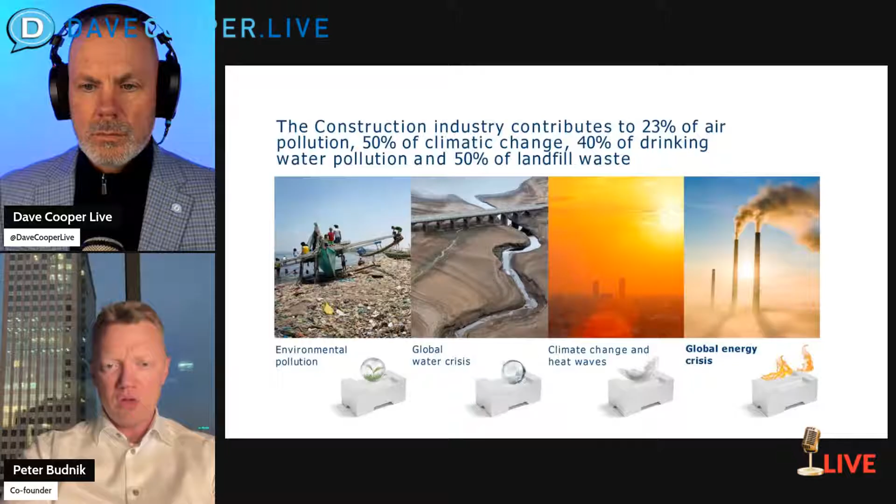Then secondly, we have the climate adaptation need, where System 3E is eco-friendly. Blocks are made from perlite and are healthy, and they reduce carbon and water footprints. Actually, we have the lowest water footprint of all the building blocks. And back to number 1, we are simplifying construction with fewer tools, materials, and labor itself. So it's actually a third point.

Then the main composition of the block is perlite, which is a volcanic rock. It has air-filled pores, which provide top insulation. It has neutral pH, so it's also mold resistant. And just this feature is absolutely a huge USP. These are just the main properties of the block.

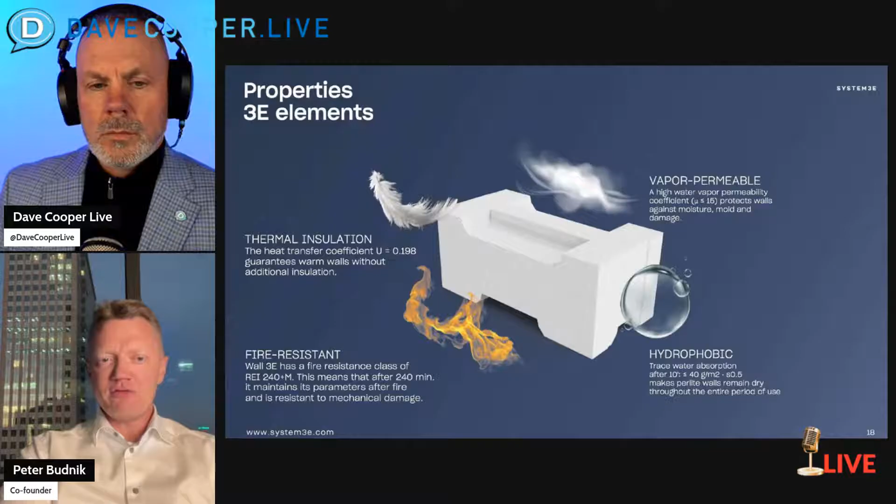It's fire resistant. It has great thermal insulation, so it's good to go in Greenland, Norway, Sweden, upper states, all the colder regions, as well as in deserts, where the width of the block, which is like 1 foot, protects both from heat and cold. The elements also breathe and are hydrophobic. We add hydrophobic agents so they don't soak any water in. So you always have dry walls, which is a brilliant feature.

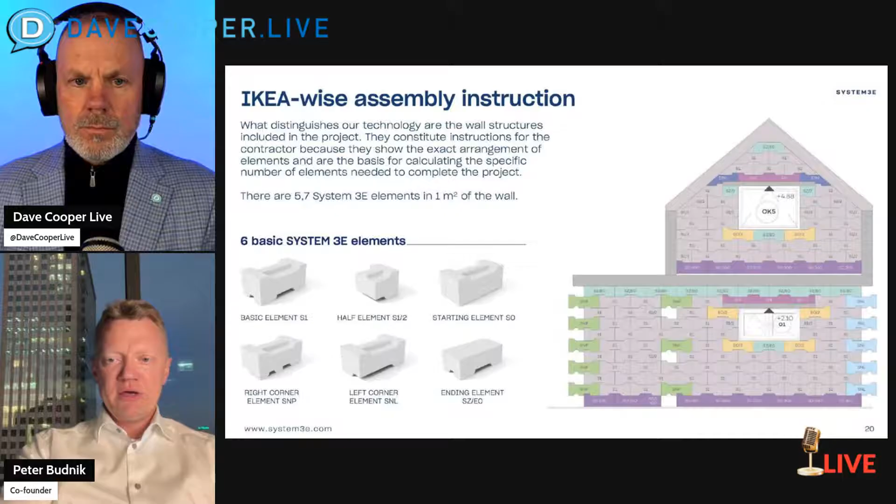So the system has 6 key elements covering 80% of the wall. IKEA-style manuals are something the contractor gets with his elements order, and color-coded parts simplify assembly. And just to recap, we have the thinnest, the warmest, and the strongest 1-layer perlite wall in the world.

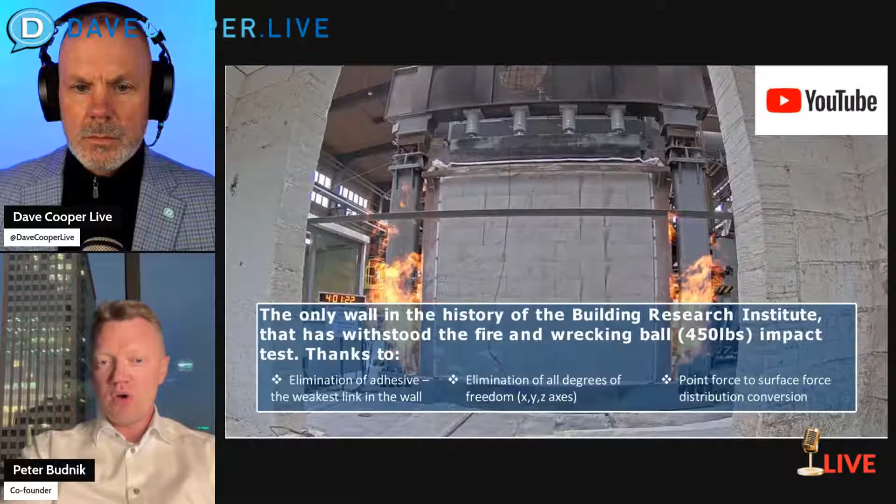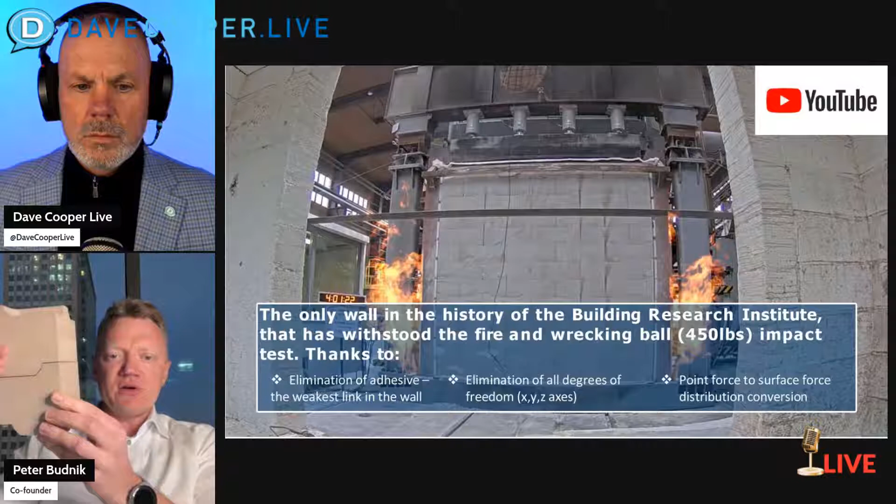And by the strongest, I mean that our wall passed the toughest fire and impact tests, where there are no weak links, because we don't use any mortar or glue. The weakest link in the wall is always the adhesive between the elements, which never maintains thermal or compressive strength parameters. And forces are distributed evenly thanks to the interlocking shapes, where all the degrees of freedom along the X, Y, and Z axes are fully constrained. And this makes our wall a monolith. So if something hits the wall, it just stays very solid without a single scratch.

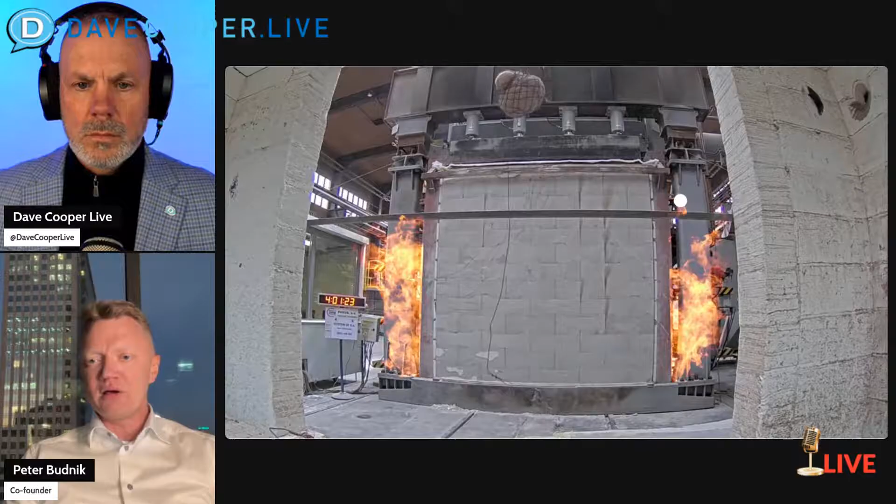We can show a short video presenting an actual test from Czechia, where we were the only technology in the history of the Institute where the wall not only passed the fire test, but also passed the wrecking ball test without any scratch, any damage in the wall. We were the only ones.

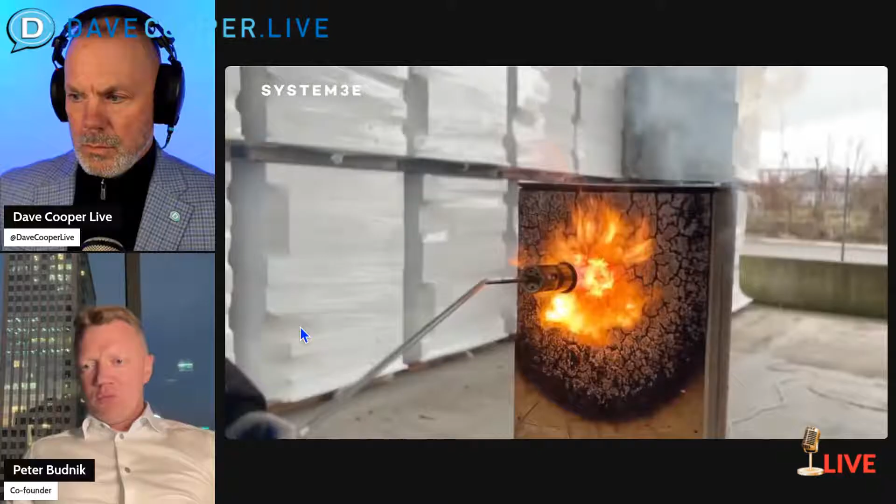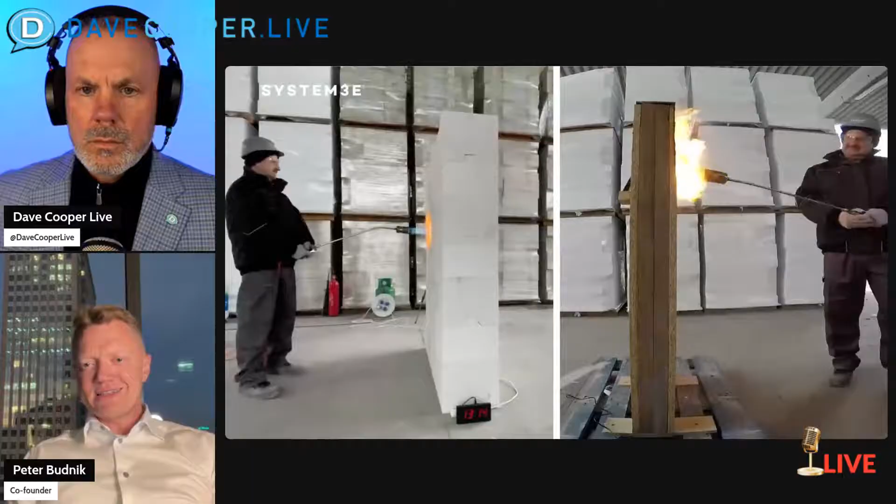And regarding the fire, we have another video that we can have a look at. It's like a small comparison between wooden frame parts and our wall. No-brainer, perlite is fire resistant. It just doesn't burn. And comparing to wood, these are not even real conditions. It's like a small torch. So after 60 minutes, you will see in a moment the burned hole. In our case, the whole wall is intact and it's perfectly fine, because we have the maximum fire resistance timings. Wow.

Is perlite available all around the world? Yeah, it's abundant. The number 1 producer is China. Then we have Turkey, and the US is number 3. So there's a lot of perlite in the States, New Mexico, Texas, Arizona, the southwest mostly. And it's 4.5 times cheaper than what we have in Europe. So if we launch a production facility in the States, the costs should be significantly lower than here in Europe. Great, thanks.

So going forward, we have IP protection, which comes from the unique element shape, ensuring strong friction-based bonding. In hurricane-prone areas, we have dedicated pre-drilled hollows that allow structural reinforcement in case that is a code requirement.

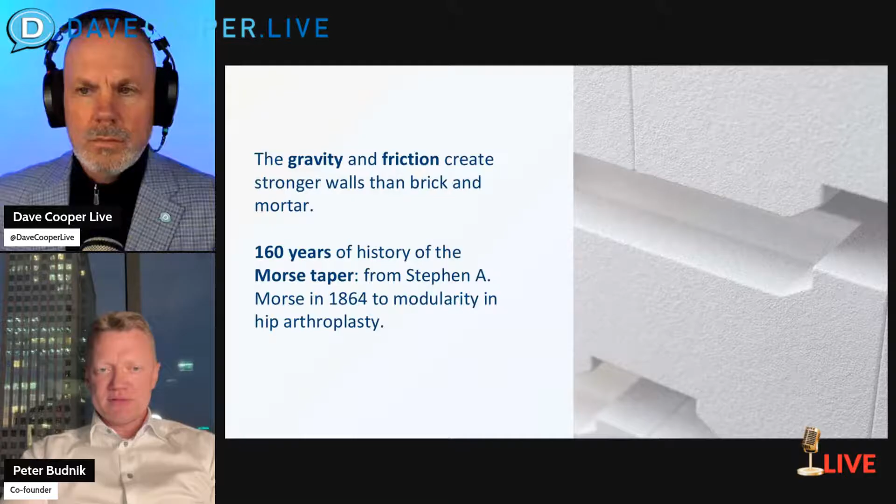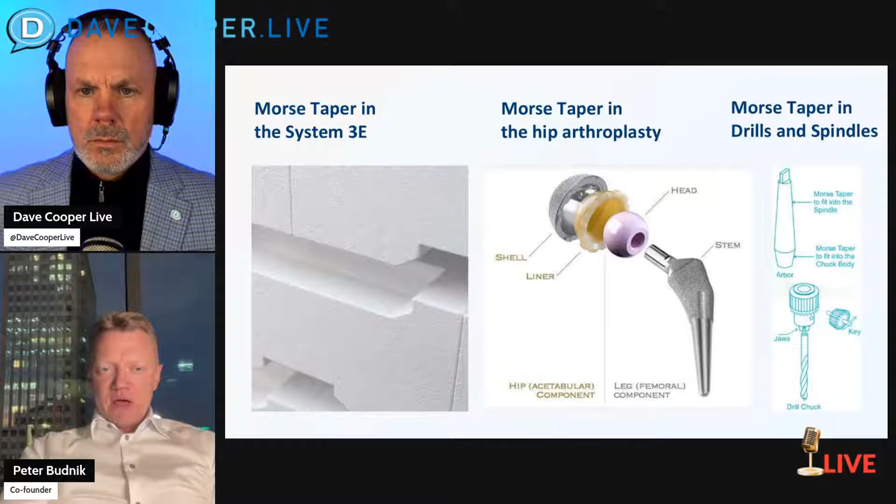So at these angles, we reach the highest friction forces, which allow the blocks to connect together. And because of the friction forces, we have the strongest binder we can think of, and it's much stronger than mortar, which never maintains compressive strength. When you read carefully the technical books of, let's say, brick and mortar technologies, they always recommend applying the thinnest layer of mortar possible, so as not to weaken the wall.

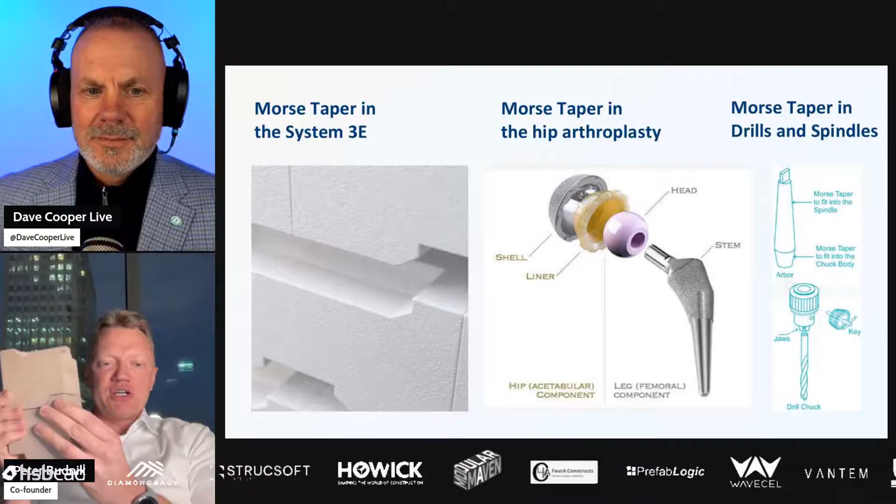And if you go to Italy or France, for example, for your vacation, and you see these old houses built with brick and mortar, when you look at the external part of the wall, you can sometimes see the cracks on the outside part of the wall, and they always go along the trace where the binder was applied. It's no coincidence that this is not passing the test of time. It's just a much stronger connection, like the gravity in the pyramids in Egypt. It's a similar thing.

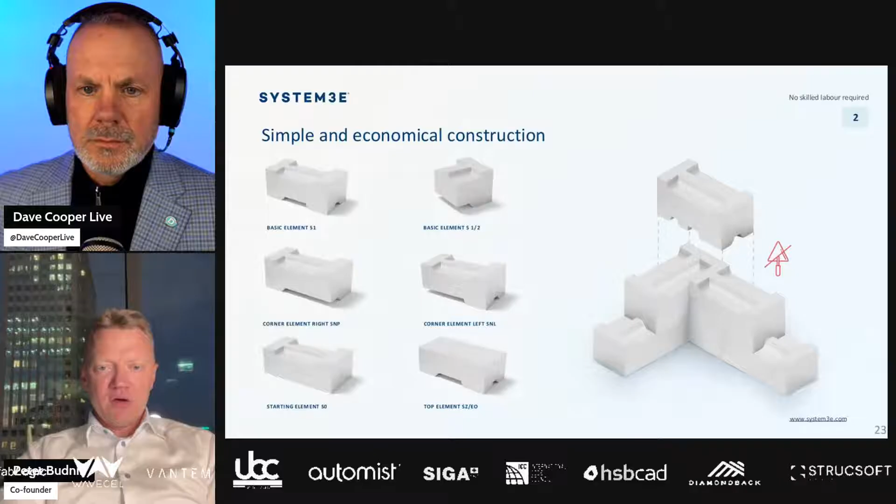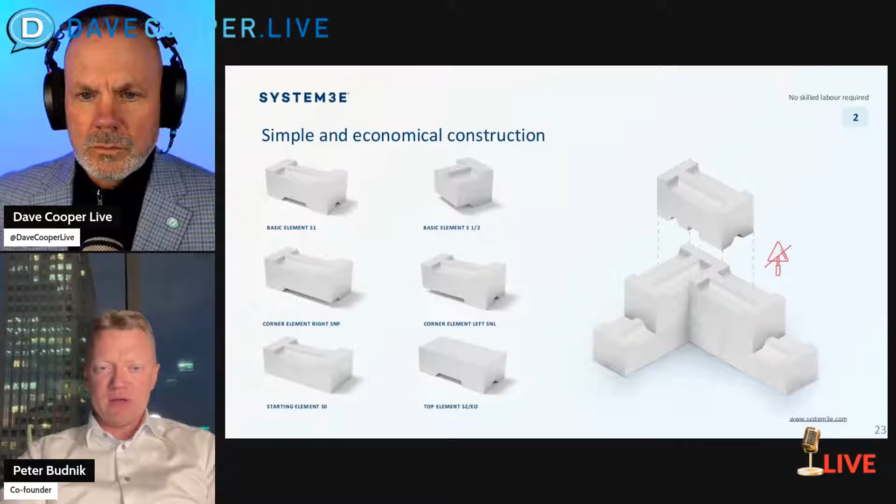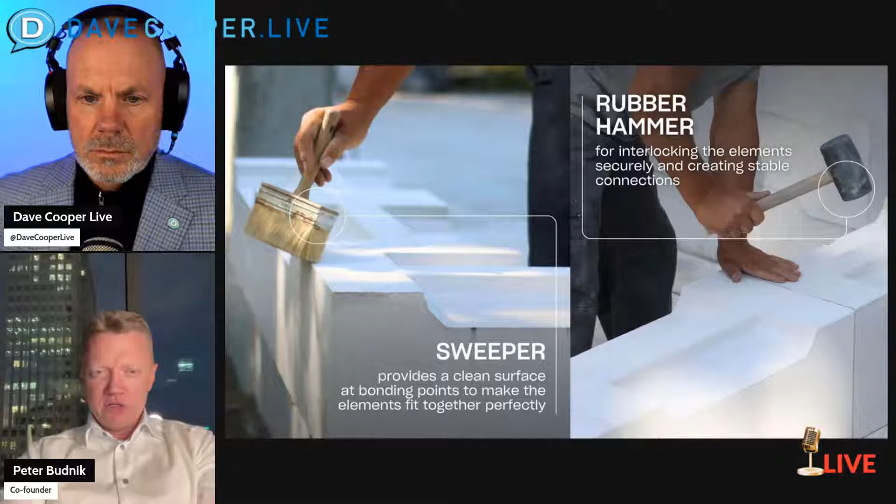So let's keep moving forward. Hold on a second. So we simply have to follow the color-coded scheme. We only need 3 tools at the construction site: a sweeper, a level, and a rubber hammer, just to press the elements down together, and that's it. This is a comparison of the tools required while using System 3E versus those needed in traditional construction methods. So you can see the difference.

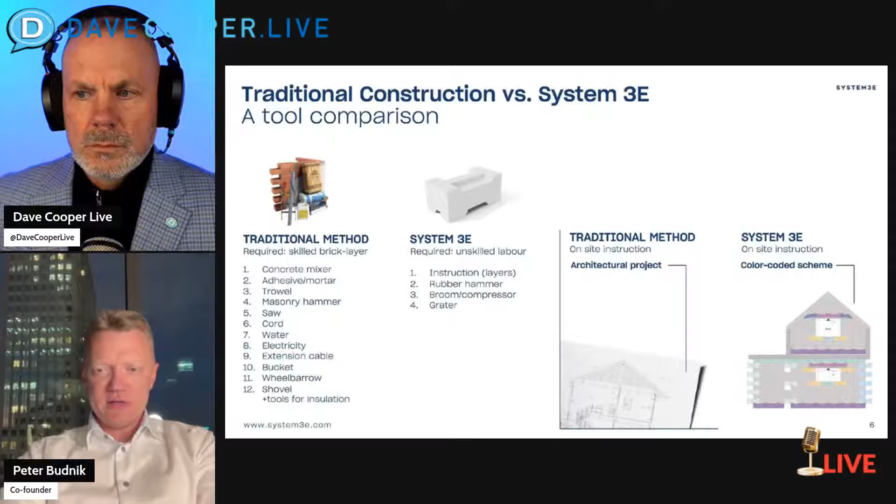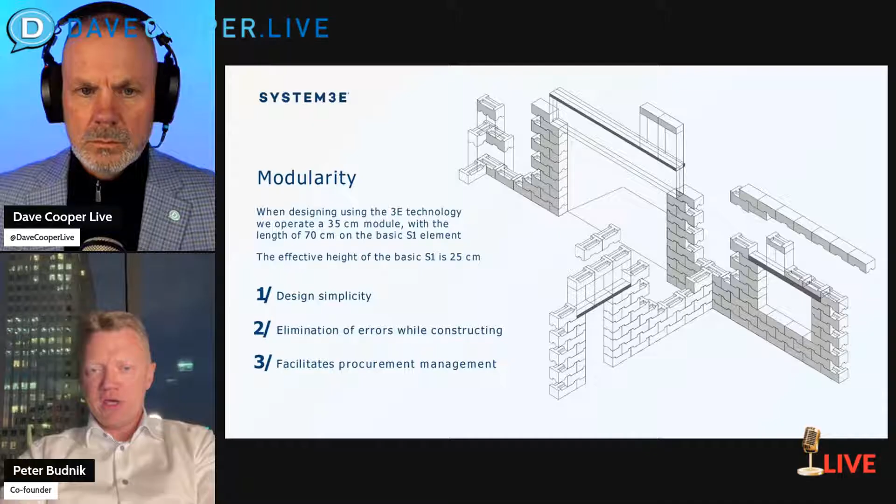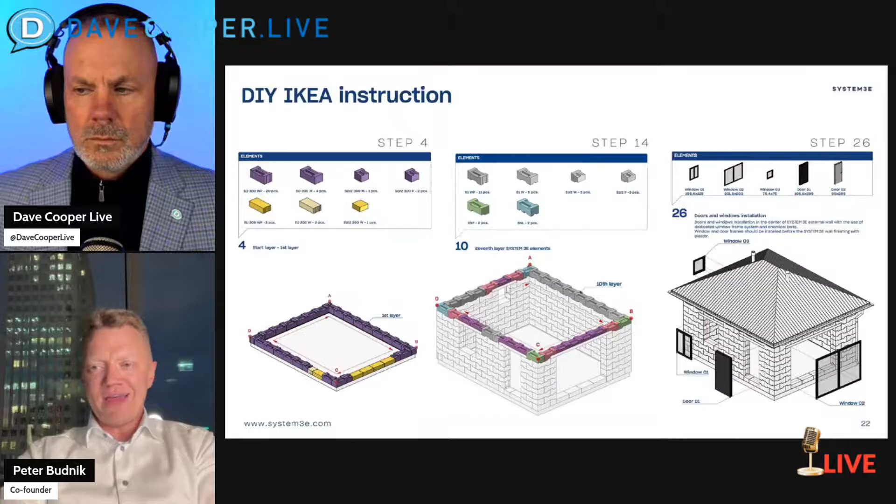And a 35 cm module, which is half of the regular element length, ensures error-free construction. IKEA-like color-coded guides make it as simple as Lego. You simply follow the assembly process, just like building with blocks in childhood. Everybody, or almost everybody, was playing with blocks when we were kids. It's the same thing. We have to follow the instructions. We don't have to have any construction experience.

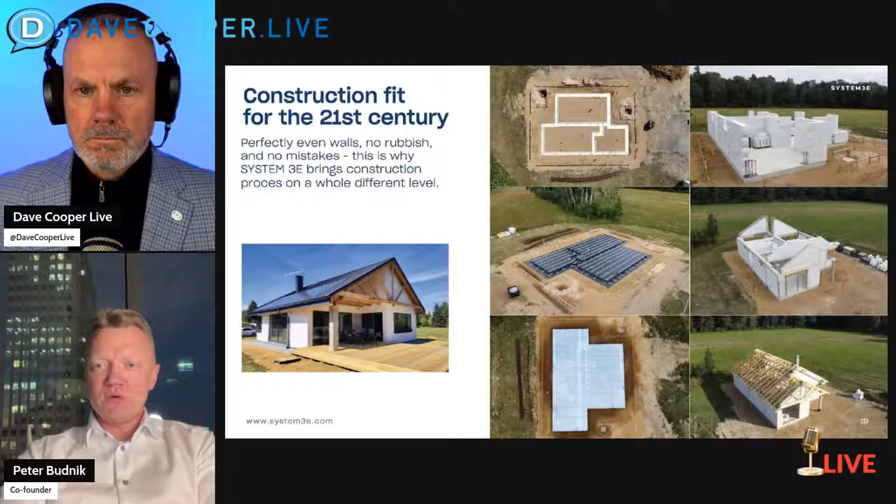And there it is. On top of that, the construction is very clean, very neat. There's no need to accumulate waste in waste containers. There are no waste containers. And this is an interesting case, a strong testimonial we have from a married Polish couple of teachers that built a house of about 1,200 square feet over the weekend. It took 15 hours.

Of course, they are not construction teachers. They're biology and chemistry or whatever teachers, no building experience at all. And they said after finishing that it was even easier than they thought. So I think it's a good recommendation. And you can see in a short video how it is being built in real life. It's that light, huh? That's it.

So you're telling me anybody, a teacher or somebody that does IT, as long as they can read IKEA instructions, can build their own house. You know, even if you are under the influence, which I don't recommend, you will not make any error during the construction. The walls will always be perfectly even as long as the first layer of elements is even. That's the trick, the hardest thing, which is still easy: making sure the first layer is even. Then you can play the music loud, barely focus on the construction, and you always get even walls.

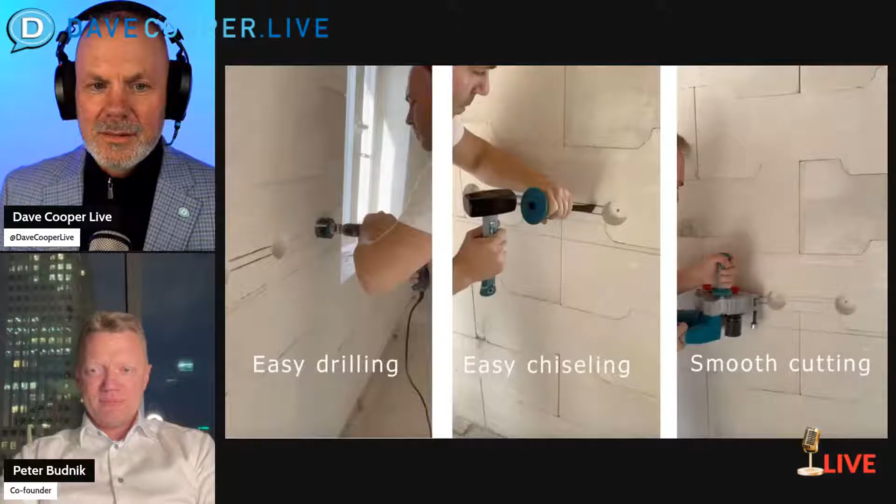Yep. So System 3E elements are lightweight, easy to cut and drill. And actually, this is one of the most frequent questions that we receive: are we able to drill? How do we put in plumbing and electricity? So this is the answer.

So the drilling is easy, which again reduces labor costs. Chiseling is effortless. Drilling doesn't weaken the structure. Everything stays locked in place. So even if we make a hole in the wall, remember that all the degrees of freedom in all elements are eliminated along the X, Y, and Z axis. So it doesn't matter that we have a hole in the wall. Don't worry about that. It doesn't change a thing. All elements are still going to be locked for good.

So this is one of the pictures presenting how the plumbing and electricity is embedded in the wall. And then we apply Perlite plaster, which we also deliver. And how is that applied? Is that rolled on or brushed on? Yeah, you mix it with water and put it on the wall and just cover it. And that seals all the joints, or what does it do? Not the joints between elements, but the holes where you have the plumbing and electricity, right? Yes. You cover it up just to make the wall even, and then you put glue, mesh, a thin layer of whatever you finish with in the States, plaster, stucco, and you're ready to go with painting.

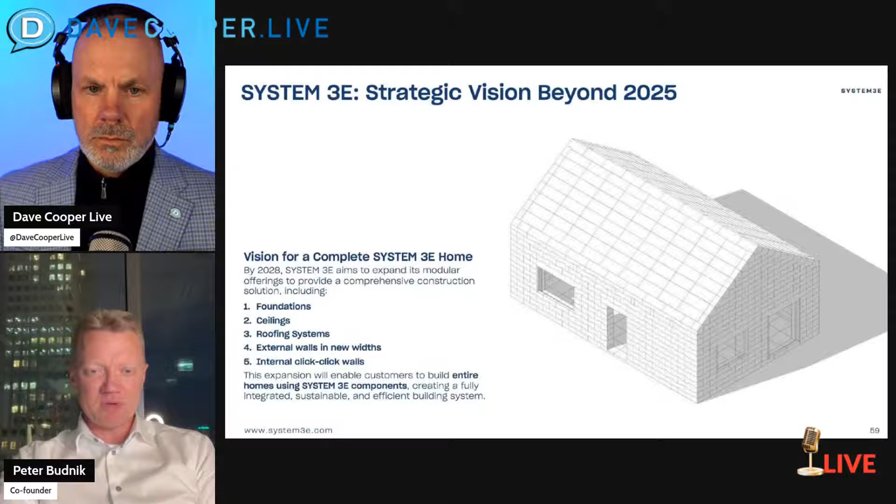So when we had the first interview back in 2021, I think we were only operating in Poland back then. Probably we had shipped some first elements to northern Spain, but we were in the infancy phase of operations in our business, and now it's looking much different. Of course, we had a factory back then. I don't know if we played the video, but I think it's good to see that everything is almost fully automated. So let's have a look. Well, you really did put a lot of automation in, right? Yeah, a bit.

How large is this manufacturing facility? It's like a 20,000 square foot building, and the plot an additional 40,000 square feet. It's not a big facility, but good enough to make a strong proof of concept and still make some nice revenues. But our goal is to expand, and we are doing this. By the way, we have many guests from different countries. We had like 25 guests visiting our facility in 2024, and at least half of them were coming from the States. And basically, we are receiving the most inquiries from the States particularly.

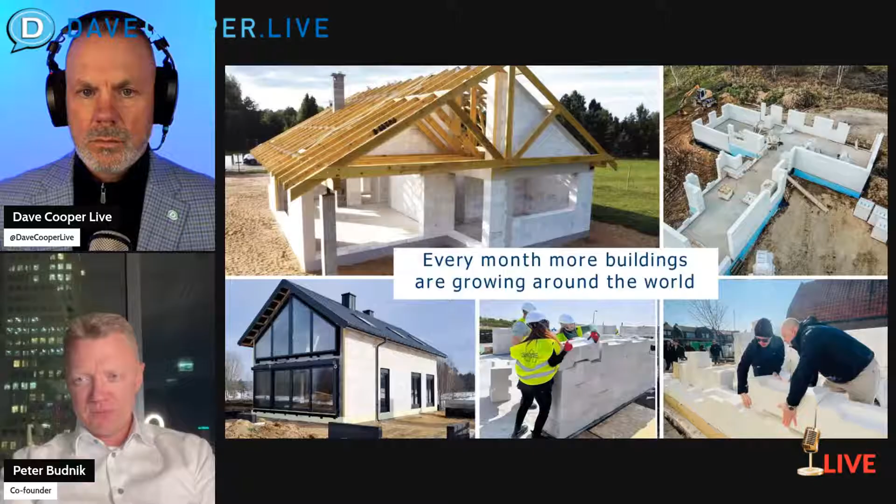Different designs, mostly modern designs, so you cannot even notice that there is something new in the wall, as it's hidden, of course. Most of these houses are from Poland. And of course, every month there are more buildings growing around the world. We have constructions in Great Britain,

women empowerment, right? Yeah. The Netherlands, where neighbors said that they haven't experienced such quiet construction as while using our system. And if you visited Amsterdam, they have super small plots, and the spaces between houses are like 6 feet distance, which is nothing. So the neighbors always struggle with new constructions. And in this case, within 2 days it was basically finished, and then roofing, windows, and that's it.

And we also have custom projects that we call modular by System 3E. These are smaller, bigger, pre-designed homes that are shipped in 1 or 2 containers, with recent deliveries to Croatia, Portugal, or even Miami. We shipped one of those small projects a couple of months ago. Exactly this one. So we have excellent references from around the world and received numerous awards every quarter.

But our primary focus remains 100% on boosting domestic production, to bring the technology to the States with a local production facility. And well, basically that's it from this presentation. I hope it was quite interesting for you, and we can't wait to start building in the US and capture even a small fraction of the 1.3 million homes constructed annually in America.

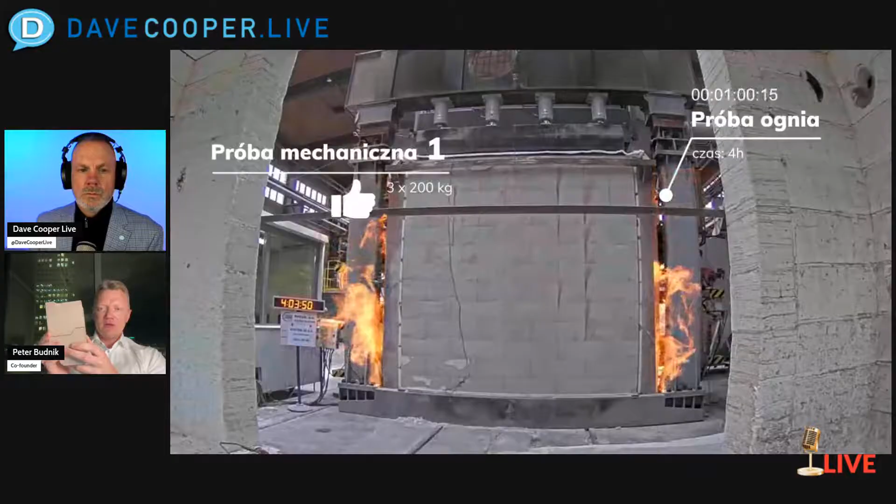And it's very important to understand that friction forces are everlasting. They can last for eons. There are no time limits in erosion or destroying the binding between the elements. So although it looks like a primitive setup, the results are not primitive, but groundbreaking, because the biggest companies were tested in the same institute in Czechia, and out of 100 walls tested before our system, 100 walls were destroyed, and they all had a brick and mortar solution, the mortar in between the elements.

In our case, because we have the characteristic shape, concave and convex, they connect together, male and female. All the degrees of freedom on X, Y, and Z axis are eliminated. So you cannot push the element in. So if the wind is coming and hitting the wall, I'm not talking about uplifts right now, but horizontal force, then the force is spread evenly in every direction. It's not looking for weakest links.

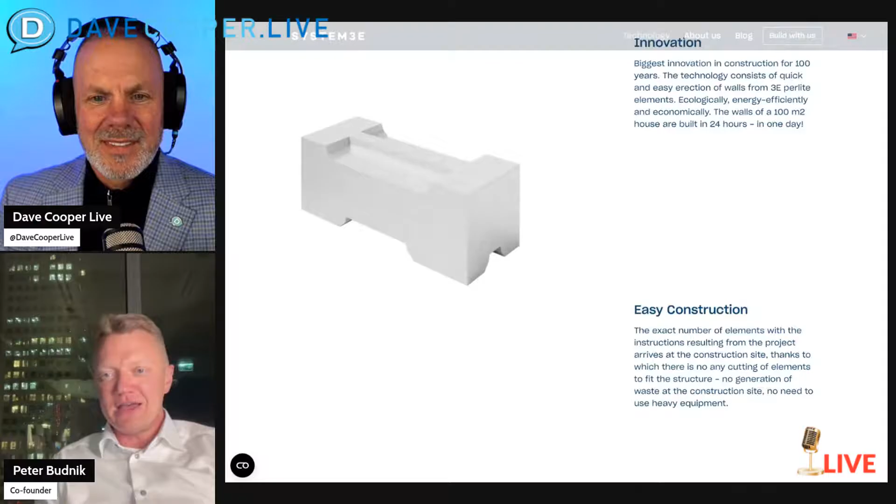Well, Peter, we're just about out of time here. Is there anything that I missed that you wanted to share with us that I didn't ask you? Now's your time before we wrap up. I think we have discussed pretty much everything. Nothing comes to my mind. So I'm very happy to be on your show again. I hope it's not the last time. I know you have a wide audience, so I can say only that what you're doing is great. Thanks to your first video, we had a huge reach among US contractors, and people are still finding out about your videos. So a big thank you. Well, listen, thank you. Without all of you doing great stuff out there, I'd have nothing to talk about or share with the world that's watching.

And you brought something to my mind. I remember when somebody saw the video and they hopped on their own private plane and flew over just to see your product, if I remember right. And I was like, really, that's really cool. And the same guy, he's a private jet pilot, and he of course visited our booth in Vegas three weeks ago. I think he's the number one fan in the States right now. Yeah, he's going to have a special place in this story, and that's great. Well, listen, that's what it's all about.